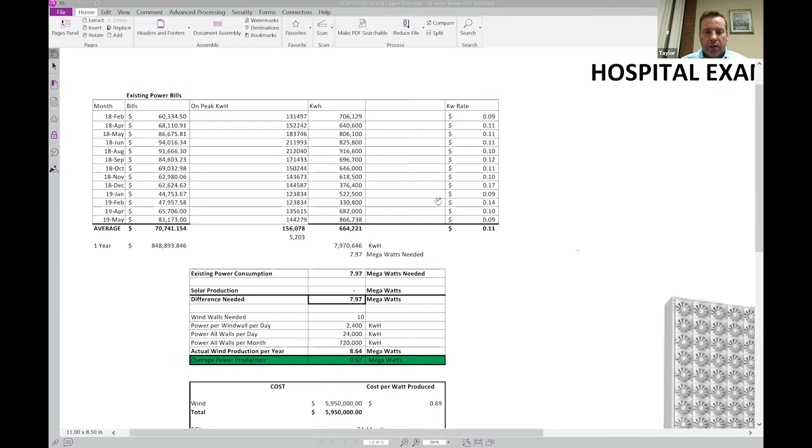Absolutely. So for your program, I've just pulled together a quick little spreadsheet that will condense most of it, so it'd be easier for everybody that's watching this. Let me see if I can just shrink this down properly.

Okay, so what I'll go over here is the initial evaluation for them, which was obviously what is the power that you guys are currently using. So we took an average of their on-peak hours as well as their off-peak hours, and we did this for every month for the entire year. So this is just a quick summary to show how much they're spending every single month. You'll notice that ranges from $60,000 up to $94,000 a month.

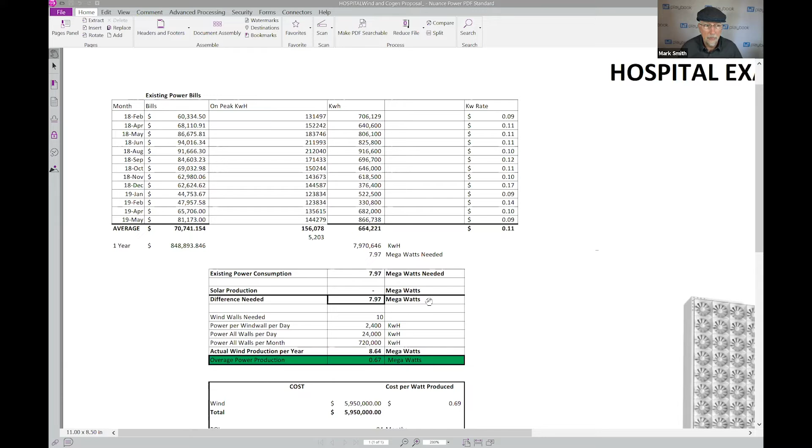And then the kilowatt rate can range, and obviously that depends on peak demand, power consumption, time of year, et cetera, but that would average around 11 cents per kilowatt. So what we were looking at is them spending an average of $71,000 roughly every month and hitting 11 cents per kilowatt. So in one year, they're spending roughly $850,000. What we needed to do was come up with a total cost, so we were looking at about 7.97 megawatts that this hospital needed to be completely off of the grid.

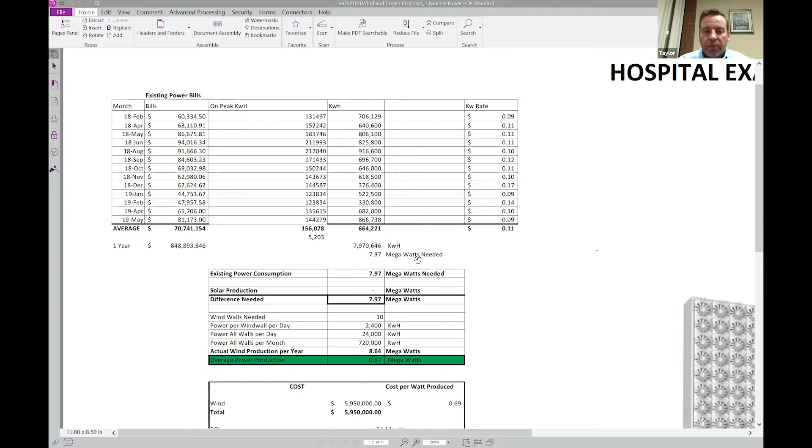So I'll show you some of the solar numbers as well, because they were looking at that. The cost for solar was roughly 3 times as much with a third of the production - 3 times as much as they were currently spending, and 3 times as much as the wind solution. So it was a lot more expensive.

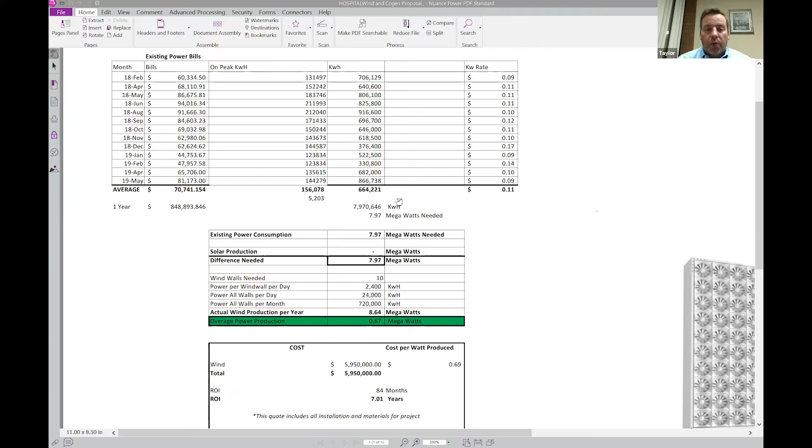So when we got there, what we were looking for is how many wind walls would they need? A wind wall - I'll show you a quick picture - is this device over here on the right. You'll notice it has multiple cubes, 100 of them. The device in the center that you see on the box actually rotates with the wind. Each one of these cubes will max out at 1,000 watts.

It only needs 17 miles an hour at max wind speed to get to that. These are going to be roughly 35 to 40 feet in the air, so at that height in that area, they're roughly always going to be at that production for wind. These devices, as they stop, are still generating due to the coil and the transformer in there, so even when there is a lack of wind, they are still producing energy for a short amount of time.

So interesting - unlike those humongous windmills you see in Palm Springs or other places, this is dramatically different than that.

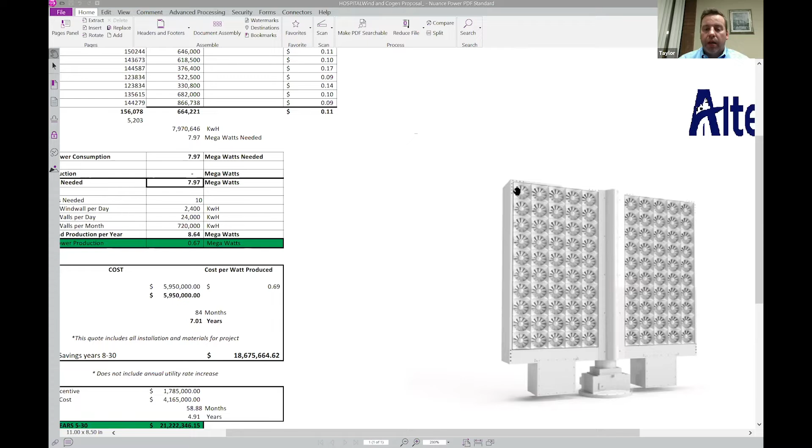Absolutely. We'll show you a little bit more on the comparison of size, but each one of those cubes is roughly a square foot - 11 inches by 13 inches.

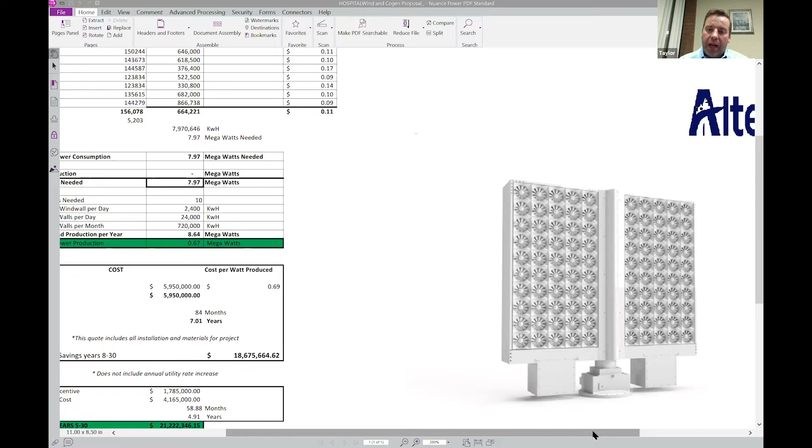Does the energy get stored in a battery? It has battery options as well and a tie grid inverter, so depending on what the client wants, it will contain it itself. These are actually magnetic - there's a magnetic force held onto it, so they're frictionless on the blades and will continue to spin for a very long time after they've been spun up. So they don't need constant wind to keep moving.

So what we've done is produced roughly 10 wind walls, which is what they were going to do. Each wind wall was going to produce about 2,400 kilowatts per day, coming out to 24,000 kilowatts per day total, and for the month, 720,000 kilowatts, which gives us about 8.64 megawatts. They needed about 7.97, so we have an overage of roughly 670,000 watts built into this.

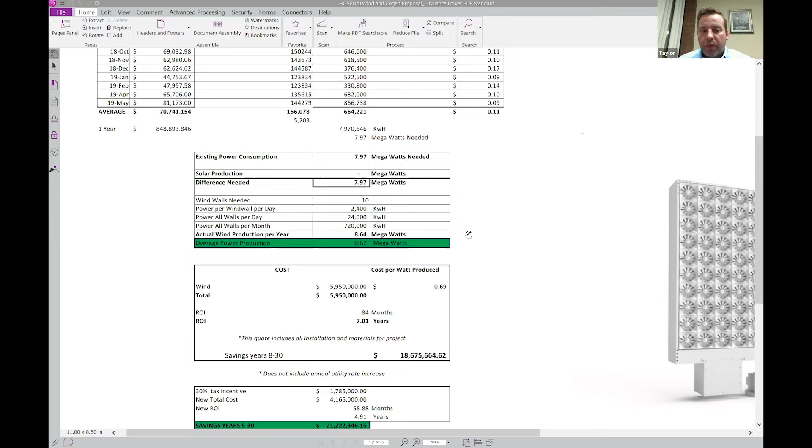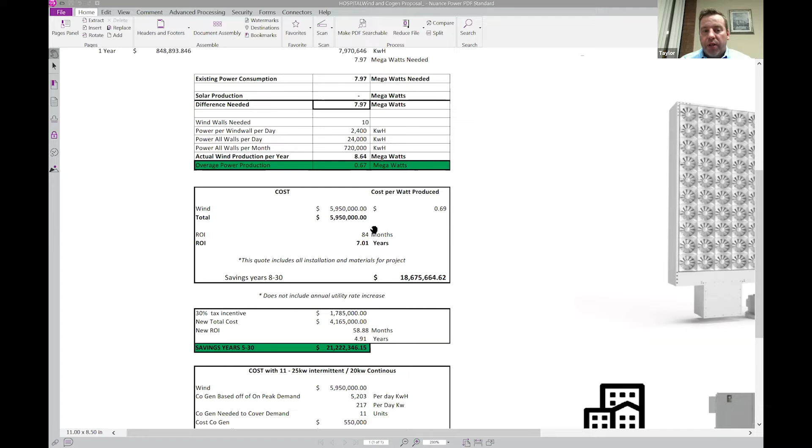The total cost was going to be roughly $6 million for the entire project. The ROI is 84 months, or 7 years. These come with a 30-year guarantee, but the great thing is there's plenty of incentives out there - there's a 30% tax incentive, which was going to reduce it by about $1.8 million.

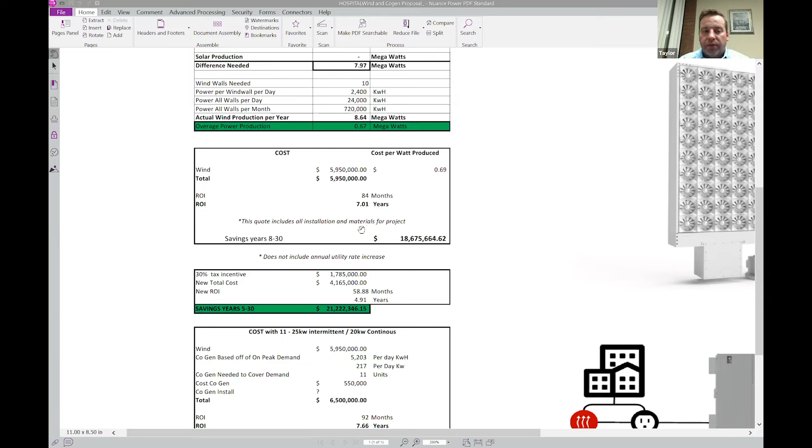So that takes the total cost of this project to 4.165 million. The new ROI based on those figures means under 60 months, or just under 5 years, they were going to be completely paid off. So the average savings between years 5 to 30 is going to be roughly $21 million that they would be getting.

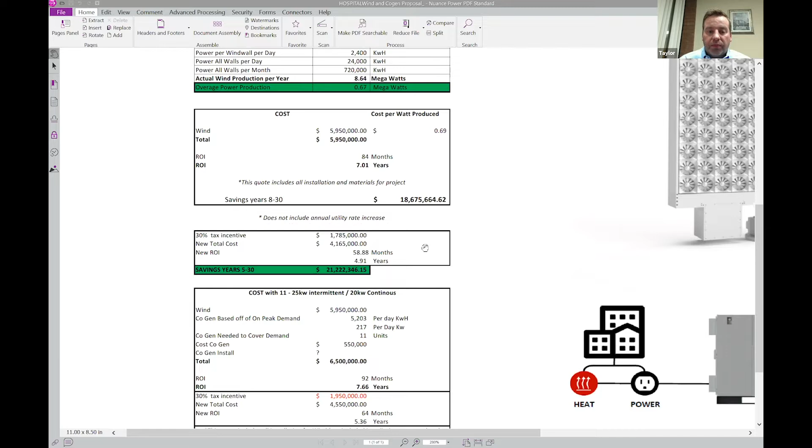And then if we wanted to add in some intermittent co-generation, they looked at having a backup for gas. So we do have another solution we brought to the table for them, just in case - everybody's always worried about what if there is no wind. This is a newer technology, so to give them something that would provide complete backup power, we did a cogeneration unit.

That runs off of natural gas, which means you're always going to have power that goes in. Natural gas rarely goes out - it only goes out if there's an explosion somewhere, and we know those are very, very far and few between. So you get a stable, steady source of power, and you don't have to worry about any type of fluctuations or spikes in the power grid.

So with that, we were looking at roughly another totaling up to about $6.5 million for the project, which brought their ROI to 7.66 years. We got another tax incentive on there, which took it down to 5.36 years.

So the savings that they were going to get for years 6 through 30 was about $20 million, adding that on as well.

And in terms of managing this thing, since it is newer technology, I'm assuming, how granular can you get in terms of managing down to the individual cube, and is it running and all that kind of stuff?

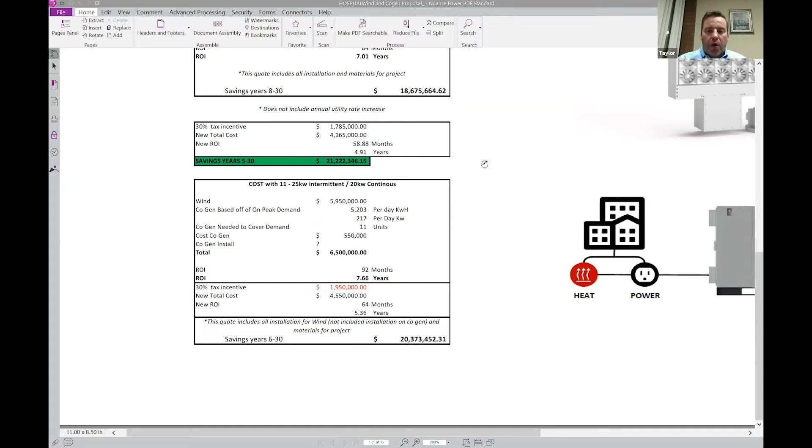Yep, there's a monitoring system. It is extremely inexpensive, only a couple bucks per month per unit. So it's very affordable, but it will give you detailed information on every single cube that is inside of all of the walls, and you'll be able to watch your power, see what's going on. The maintenance is really an oil change, because it's the device that actually moves the unit with the wind, so you need to do that once a year.

The maintenance on the cubes themselves is virtually zero. You may have to change out a transformer inside one of those, and that cost is a couple hundred dollars, and it's a very easy unscrew, pull out, put it back in, and screw it back in. So that maintenance for the long term, even after that 30 years, is significantly cheap.

How did you find this? So actually, this company came to us through when we were doing our smart city innovations. We had a university that we were working with on designing out a ground-up smart city south of Atlanta. They were partnered with us on some of the original designs, and they have one of these at their facility.

It was 3D printed. It was one of the first units out there, and they started talking about it and mentioned it. So I immediately called up to the company. It took them about another 8 months for them to go out full blown and actually start selling them. They did have some small government contracts prior to us coming on board.

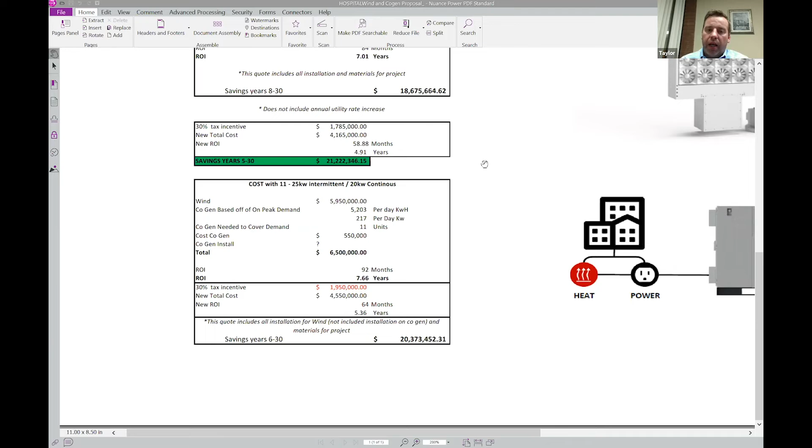But right now, this is the first year that they are selling to the public, and they're doing it in a very selective manner. Very few partners and very few clients, just because they want to make sure the rollouts are accurate, they're installed properly, and people understand the technology. And then they're going to get into a much broader rollout and attack all areas at that point for sales.

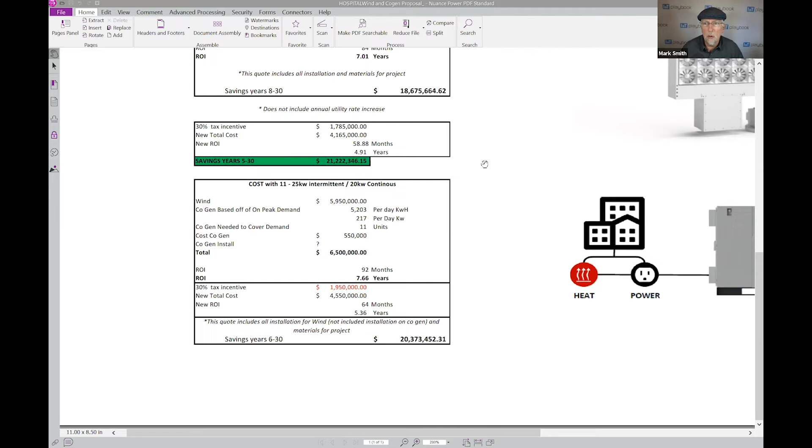So what's part of the, so you walk through the wind wall, and you've got another little diagram that says heat and power and whatnot. So what's sort of part of that offer then that goes there? I mean, they get the wind wall, they get obviously the management, because you also have yourself developed a unified dashboard that they can use.

Do you utilize that? I think it's Azure based. Did you use that in this scenario? We did not include our own system in there. They have their own BMS. We're looking at potentially moving towards that, but for the moment, we're going to be integrating the existing monitoring system into their platform for them.

Just out of curiosity, what are they using for their BMS? Is it like Johnson or? Yeah, actually, it's a Johnson control system. Okay, all right.

What other things have you discovered along the way? Because first of all, your big thing is getting them to shift over from solar to wind, and obviously the numbers support that pretty dramatically. How did you prove to them that, hey, this technology will work? Since it's fairly new, did they need a lot of proof to just say, hey, this is going to work?

They have, but this product itself is published in a few different areas. It's been tested, again, through universities and through several other independent studies. And those are available, and we let them talk to the inventor. We're going to be actually bringing up a cube for them to play with here in the very near future.

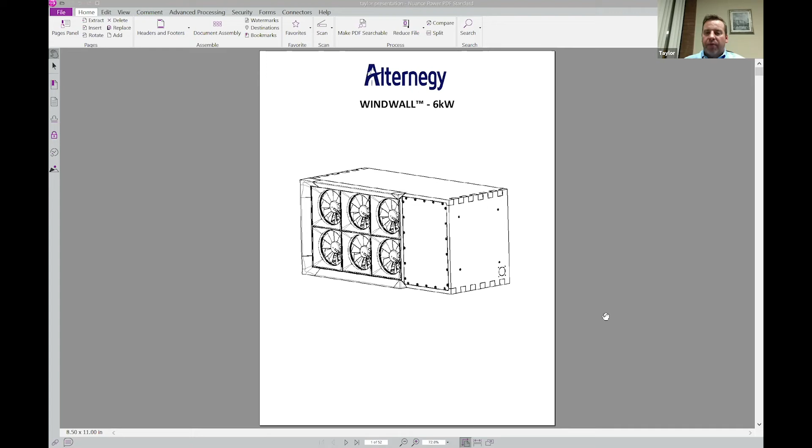Absolutely happy to do it. One thing to mention is that we were able to really pitch this on an as-a-service model. Most likely they'll be doing that particular part of the project, which is a 10-year payment plan. Their power bill right now is roughly about $75,000 a month. Their monthly payment on the as-a-service model is going to be around $30,000 to $33,000, which is less than they're paying now - about half of what they're paying in power. So they will be cash positive month one when they start doing this. They'll never actually go negative on balance.

That's an amazing business model. Did you bring in - I know in your previous episodes you talked about bringing in Lloyd's of London as your finance partner - is that who helped put this together? They are the backer. We deal with an independent agency, somebody I've dealt with for a very long time. He was actually an LED manufacturer back in the day, but he's got a lot of banking relationships and was able to pull together an as-a-service model for us about 5 years ago for lighting.

And we were able to parlay that into our IoT space. Really almost anything that has a savings over the cost, we can put into an as-a-service model - it's not just limited to this particular item. So normally in the old days this would be a big CapEx deal, and they'd have to go get millions, like $4.5 million of funding up front. Now you spread it out as a service.

Who assumes that risk if the client says, hey, this isn't working? How does that risk get shared? So it is backed through the insurance company, and basically the insurance company vets out the product to a very granular level. They will actually cover costs if the machine itself fails, so they're completely covered in that aspect. They would also look at potentially doing a refund if it got to something that was just disastrous - we've never experienced that, but that's there. So they know that they're getting guaranteed savings.

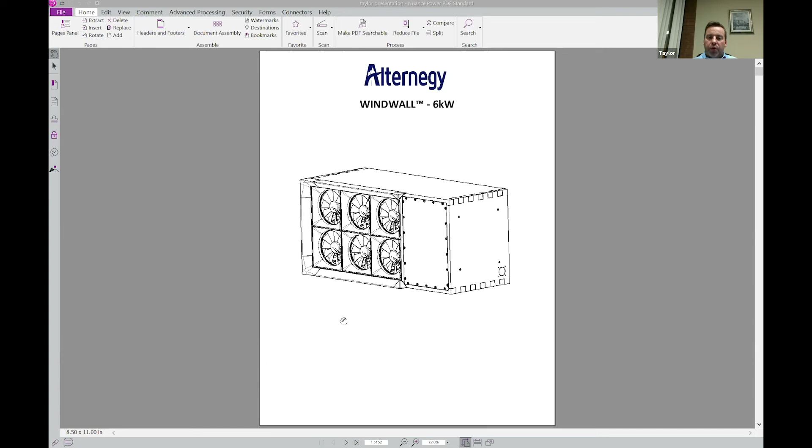It is just as strong as steel. It is literally bulletproof—you could shoot the same spot three times in a row and it would just put a minor dent into it. But it is lighter than aluminum. So this product is amazingly robust.

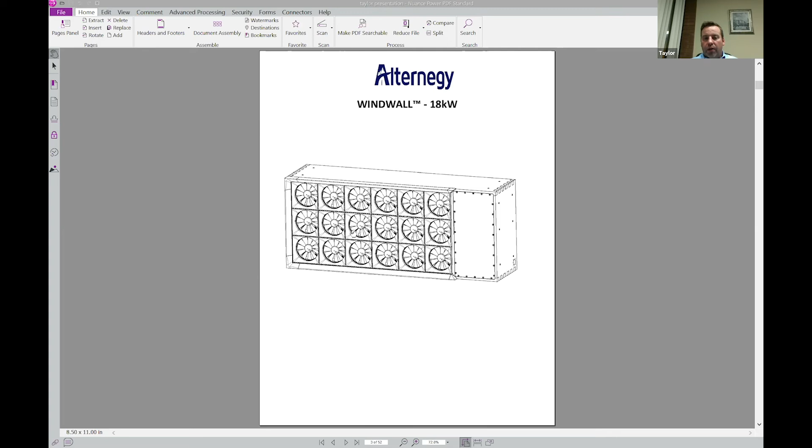These drawings are just drawings because this is a new rollout they were able to do. What you'll notice is they're just stacking them together, and over to the right there's a little knockout so you can continue to adjoin these together. You could also stack on top of them. So that's the 6 and the 9 kilowatt, 18 kilowatt—you can see it just keeps adding to it. Then it goes up to a 27 kilowatt machine.

But the single units, they're not looking to produce those right now until they get to larger orders, a minimum of 100,000 each. The MICROCUBE is 1 kilowatt each, roughly about 6 amps on max, and they weigh about 9 pounds. They can actually handle up to 100-mile-an-hour winds before you have to take them down. Some are rated for up to 140, depending on what you've got—these are basically hurricane force winds that these can withstand. They can get up to a category 2 or 3 before you need to pull them down.

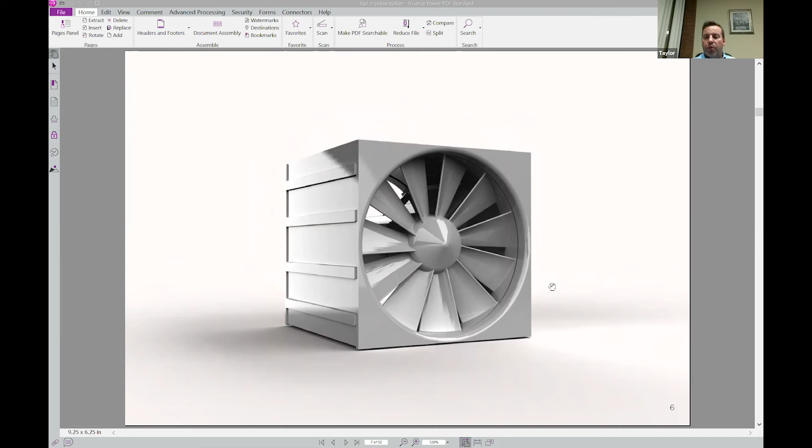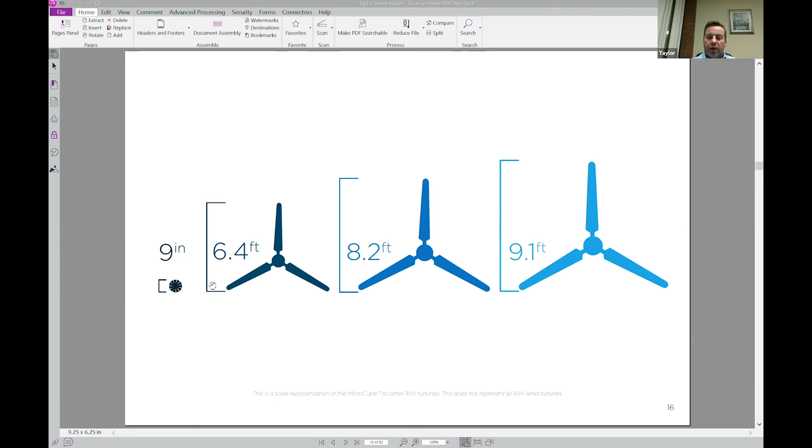We'll go through some of the advantages: size, volume, wind speed. It's quiet, there's limited drag, it's environmental and wildlife friendly, as we talked about. You'll see here there are basically 9 inches in diameter for what this cube is going to do, and you can see that other turbines out there range from 6.4 feet to 9.1 feet.

So when you're comparing that to size, you can look at a scale representing our advanced WINDWALL next to the person on the left. To produce the same amount of power, you're looking at the turbine in the center, and then what a 100 kilowatt solar farm would be needed for. So when you hear the anecdotal argument about needing to power the U.S. with wind, you'd need to put that second wind thing over the entire state of Texas. With this new WINDWALL, it's a bit of a game changer.

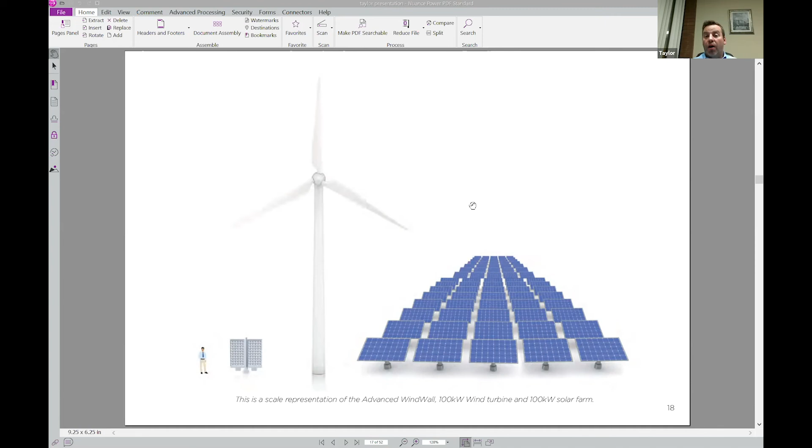Everybody's got their position on ideas like the Green New Deal, et cetera. But this particular unit would actually take people off the grid. This can further off-grid and green technology, and really eliminate the need for a grid on new build-outs and retrofitting.

Again, just a quick look—you'll see that you lose all of that energy with the wind with these other turbines simply because they're not handling it well. There are only 3 propellers, whereas ours has propellers all the way through it. Again, our wind speed is the best, under 4.5. The national average is 4.7 miles an hour, just as an FYI. So with that, you're not going to get any type of turbine that's out there originally working with that 4.7.

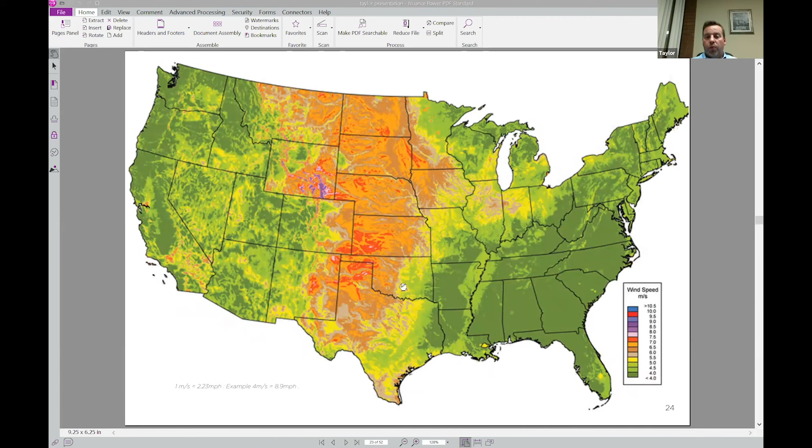With the WINDWALL, you will. So that's the 4.7 miles an hour average. Is that at 30 feet high, like the optimal measurement, or is that just in general? That's in general—that's down to the ground.

Again, the only thing you'd have to do for environmentally friendly is a core exchange, which is every 30 years. And that is an extremely inexpensive process, and it's very quick.

So once you've put the initial investment in, let's talk about solar. You put the investment into solar, you're going to have that degradation. Over 30 years, they're still going to work, but they're not going to work nearly as well.

And then once they're done, the dirty thing about solar that nobody really talks about is they cannot recycle solar panels. Nobody knows what to do with the panels once they're done. So granted, people can continue to use them. There are satellites in space that have been using solar for 30, 40 years, and they are still operating. But you're losing that efficiency.

And again, if we flooded the entire country with solar panels, there's going to be a huge concern as to what do we do with these panels once people want to upgrade or start trashing them. You simply cannot throw them into the trash.

And with this, I mean, because it's cube, like Lego blocks, if one thing happened to go out, you can hot swap it, right? And the rest of the unit stays up. You can hot swap out one cube and pop in another one and then fix it. Does it work that way? Absolutely. Every one of these has its own independent transformer and generator. So one could fail and you would be able to swap that out without losing the ability to have the rest of the power running.

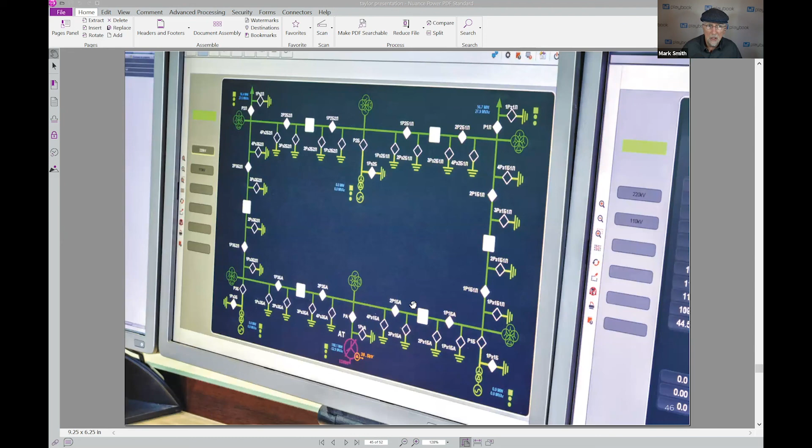Yeah, absolutely. So here's an example of one of the monitoring pages in the system. It'll tell you what each one is generating. It'll tell you when it's not pulling right. Obviously, if the power is spiking or there's one that's just not producing as much power or it's fluctuating, then it knows that there's something wrong with that particular unit, and it's going to let you know.

It can send you a text message. It can send you an email. And then when we add our system into it, we can add phone calls and then actual reactive measures where it kicks on an alternative generator.

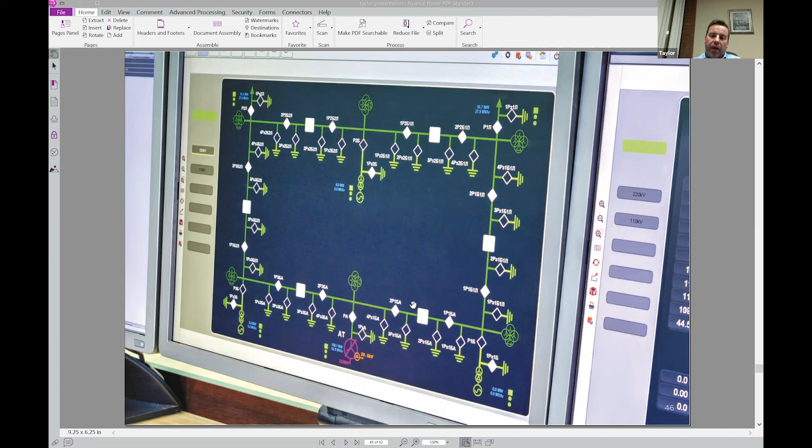This particular hospital, they have 4 different types of power once this is installed. They're going to have the wind walls that we're putting up. They're going to have the cogeneration, the gas lines that are coming in. They are still going to be tied to the grid and will be able to use grid power whenever they need it. And then they'll also have their own backup generators, which are still in process.

Very cool. Yeah, and then as a service and stuff, there's a piece of that fee that's just for ongoing monthly recurring revenue management for you. I don't know what percentage of that, if you want to disclose.

It's really just a couple dollars per unit. We're not trying to make a lot of money on it. We have the ability to mark that up if we want, but honestly, right now, our goal is to continue to grow that management platform. So we just have a little bit of commission built in for ourselves that maintains our ability to go out there and do any type of management we need without incurring additional charges to them.

Right. So this is, in some sense, a showcase deal where this could be a great case study for doing this all over the place. Absolutely. Yeah. Okay, that makes sense.